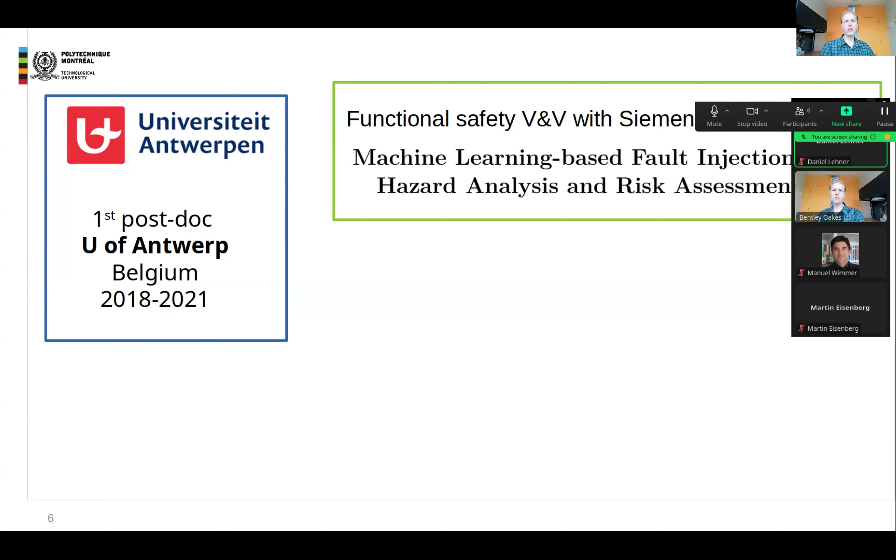I just want to do some brief slides so you know my background. I did my master's and PhD at McGill University. I did some work in video game AI for my master's, and then for my PhD, I did model transformation verification as part of a Canada-wide project. This is where I got into formal techniques, formal verification and validation. It was with IBM and GM, and I did a research stay at GM. Then I did my postdoc in Antwerp with Hans Vangheluwe, continuing this V&V line of research, doing functional safety V&V, really getting down into the co-simulation level.

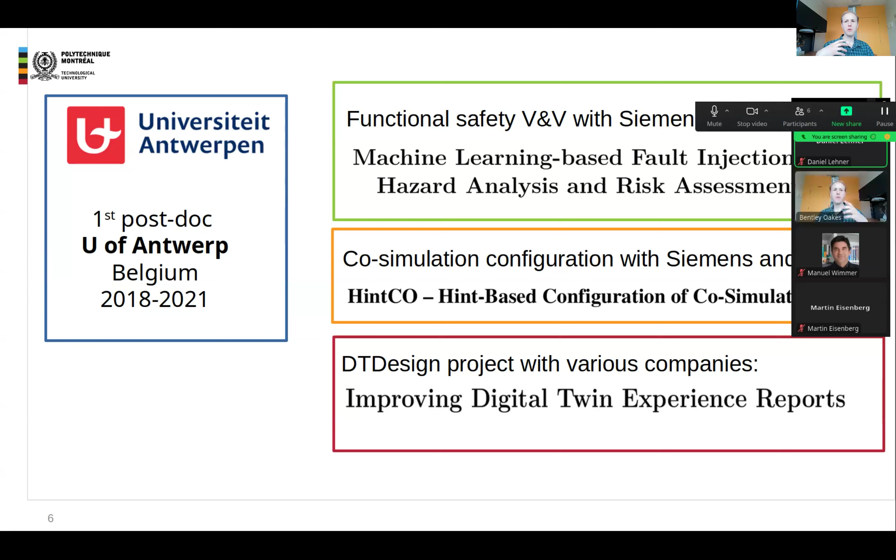And then I started getting into digital twins. One of the first things we worked on was the DT design project, which has been fairly successful with many publications. This is where it started, with experience reports and trying to improve the reporting of digital twins. Then I came back to Montreal, did my second postdoc, working on domain-specific machine learning workflows - an entirely different line of research. I started getting into ontologies, working with NASA JPL, discussing their tool OpenCaesar, which is a really great tool for creating ontologies, but I'm not going to talk about that in this presentation.

I've still been working on digital twins during this postdoc, looking at model qualities. Now at Polytechnique, I'm an assistant professor in the Oakes Lab, and really it's about accelerating knowledge engineering for complex systems. I want to take everything I know, my background, and combine it together to ask: how can we take domain knowledge and use it to create digital twins for complex systems, making them safer, better, and more efficient. So the current focus of my research right now is accelerating and systematizing digital twin engineering. I think there's still a lot we need to do.

Okay, so what is a digital twin? Don't worry, I'm not going to spend too long on this, since I assume you have the background. I always like to point to Andreas Fortman's wonderful literature survey - 112 different definitions. Just to show a few of them here, all these different definitions. When I was teaching this in class, I scared my students and said, okay, now I'm going to take the next 3 hours and read them all in a monotone voice. But I show this just to say there are all these definitions, and they don't quite represent what a digital twin is.

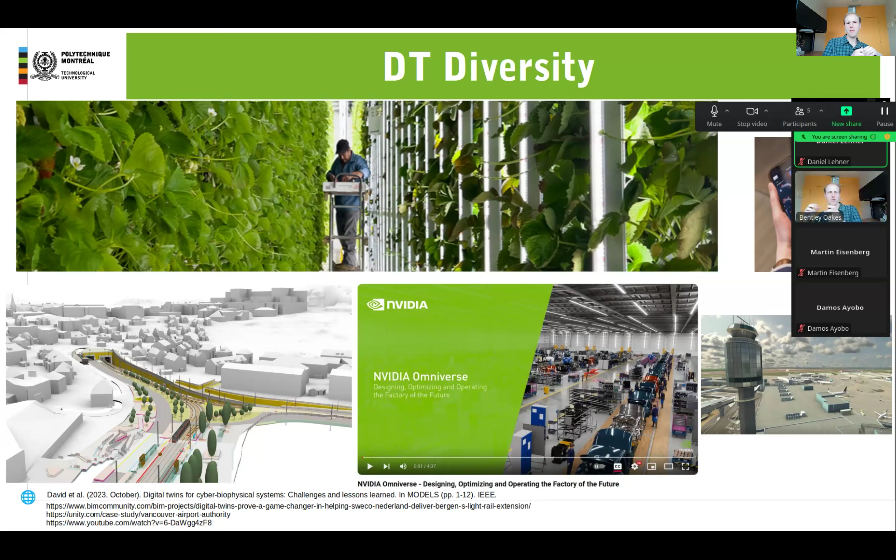So it's a fantastic example of a digital twin. There's another example, and I'll put the links down here, of the Vancouver airport built within Unity with a little app. You can see the passengers moving around and the security problems and things like that. All of these show different diversity, different loops, different temporal loops - some with nothing built yet in the real case, others with cyber biophysical systems like the strawberries, which have a different loop and you can't really control the strawberries. There's so much diversity here.

So whenever I talk to someone, whenever I talk to a researcher, I don't want to talk and argue about definitions - is it dynamic and virtual, is it a model, how do things connect. I don't want to. I would rather talk about what a digital twin is and what it does for you.

So whenever I talk to someone, my questions are: okay, you have a digital twin, what services does it provide? Is it real time? How did you engineer it, what was the process? Because I'm a researcher, and many other questions. But I like to focus on this way and say it's question based, right - it's not the definition, it's what have you built already.

Another aspect of this is just unclear info and reporting. From this first paper in 2021, I was reading these papers and I was just like, no, I'm missing essential information, I'm missing the answers to these questions that I want to know about because of the lack of standardization. As an example, I hope everyone is familiar with the definition by Kritzinger.

The difference between a digital model, a digital shadow, and a digital twin is the manual and automatic data flow. For a digital shadow, from the digital object to the physical object, things are manually done, and in a true digital twin, if you want to call it that, from the digital object to the physical object it's automatic. To put it another way, is your digital twin doing something automatically on the physical twin? If so, then it's a real digital twin by the definition of Kritzinger. We can argue about whether this definition is good, but for me it's interesting because I really care about whether it's automatic or not. If you think about the automatic collection of data, I think that's a really significant difference.

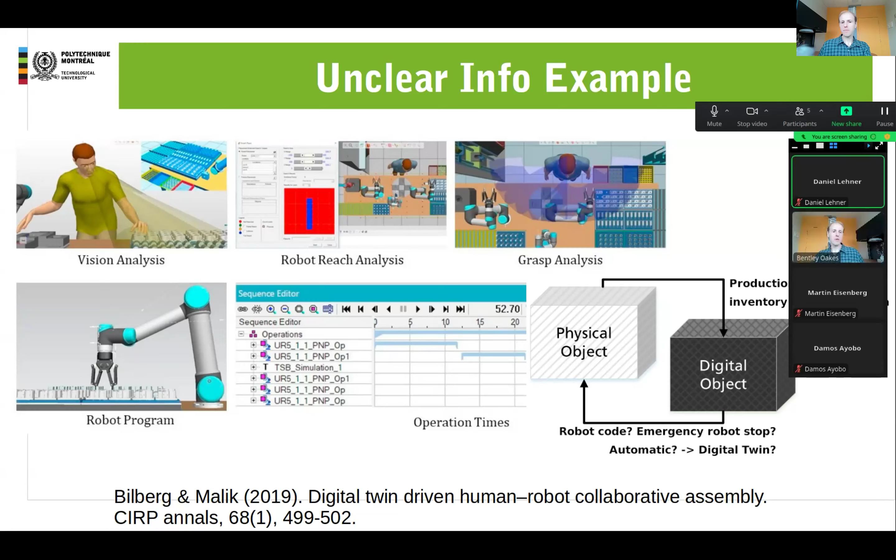So go farther into acting as a researcher - yeah, I care about the services, the technology, the models, the engineering milestones. Yeah, that's what I mean.

The community series is all about, and the wonderful EDT.Conf is about, gathering information and sharing this as researchers. So I want to know this. I want to see this in papers. I want to read, okay, what exactly was done, and not being vague.

Here I mentioned the ACM empirical standards, the case survey of reading all these papers and then taking the qualitative data and turning it into quantitative data. If we had more explicit case studies in digital twins, we could start to do these higher level surveys and systematic literature reviews and say, okay, what are people actually doing in their digital twins? And we're not there yet.

So that's what I want to do. I want to push this forward so that we can do further research. Okay, so that's the motivation. I hope everyone agrees with me that we need to make it more systematic, really.

So I'm going to move on to our proposal for the reporting framework. The goal is to come up with some characteristics, and of course there's no correct answer for this, but just to say, okay, what are the characteristics that we would like to see reported and discussed in papers? Move towards some common language, textual and graphical. For me, it would be nice if we could start to agree on some terms and some visual representations, though I know my preferences are not others' preferences.

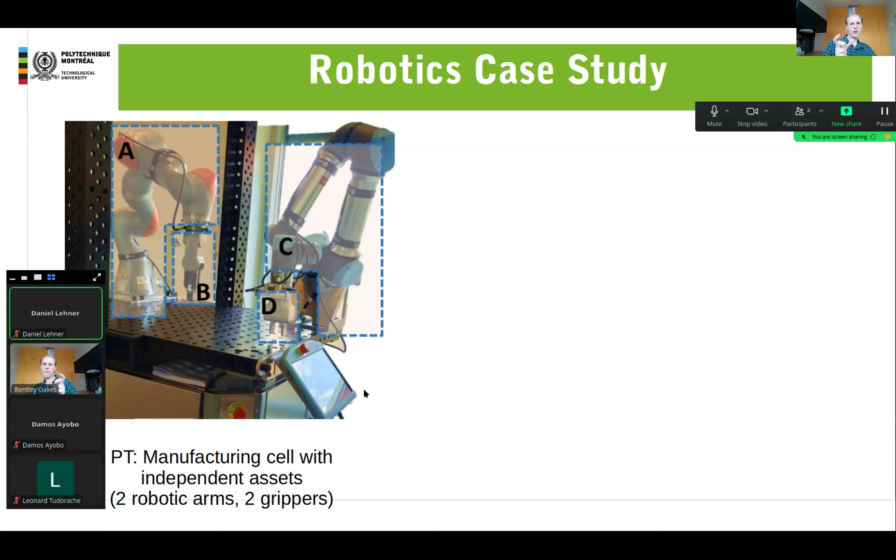And on the digital side, this is a visualization in Unity, but what I want to highlight here is the services - what can the digital twin do? It does what-if simulation, trajectory visualization, discrete working space commands, and deviation checking.

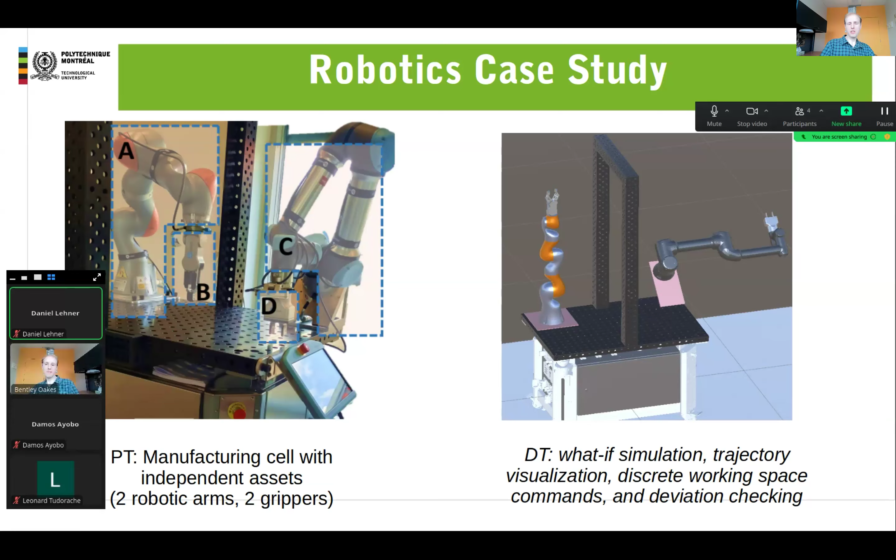But my hope is that we can start to create these figures and say, okay, this is my digital twin, this is what it's doing. For me, this isn't the complete visualization - I'm sure there will be many iterations in the future, but it's just to start and say here's the conceptual architecture, here's how the data flows through it, and here's what's being communicated with the physical twin, because sometimes that's really missing in papers.

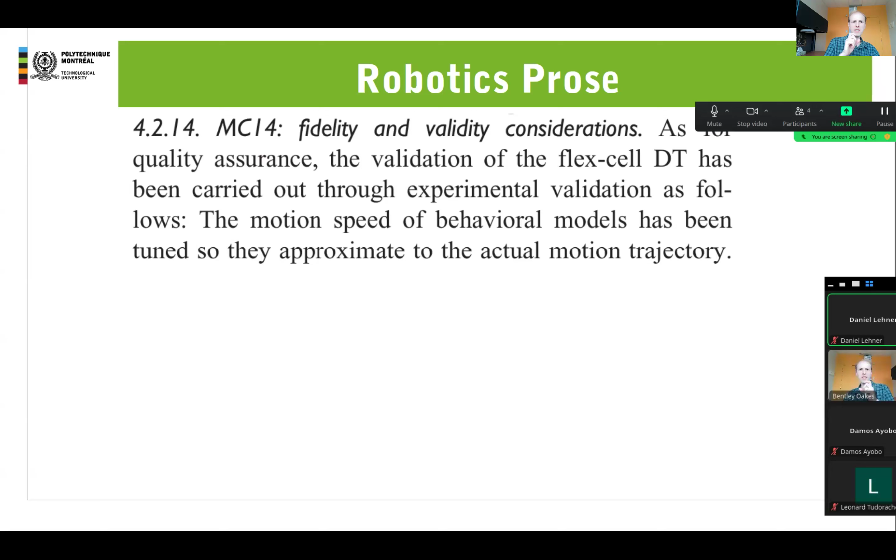We've heard about this, I've read about this a lot, but people don't explicitly talk about it. So this is just a section from the journal paper. As for quality assurance, the validation of the flex-cell DT has been carried out through experimental validation as follows: the motion speed of behavioral models has been tuned so they approximate to the actual motion trajectory. And there's more description of this characteristic.

And that's for the validity considerations. Then looking at model fidelity, which is again another thing that people say - okay, my digital twin is high fidelity, it's just okay, but what do you mean by that? I really want people to describe in their papers what they mean by that. So here, some of the limitations in terms of model fidelity are as follows.

Kinematic models do not include the kinematics of the grippers. Trajectory generation provides certain time behavior based on assumed motion speed, et cetera. This is details for the robotics case. But again, what I want to see is tell me in your papers about fidelity and validity considerations.

When I read these as a reviewer, I'm not going to reject it based on this. These are just limitations of your project. That's okay, you only have so much time and effort to spend on it. But tell me how you know it's high fidelity. Tell me how you know that your digital twin is valid. I want to know that. I think it's very, very important.

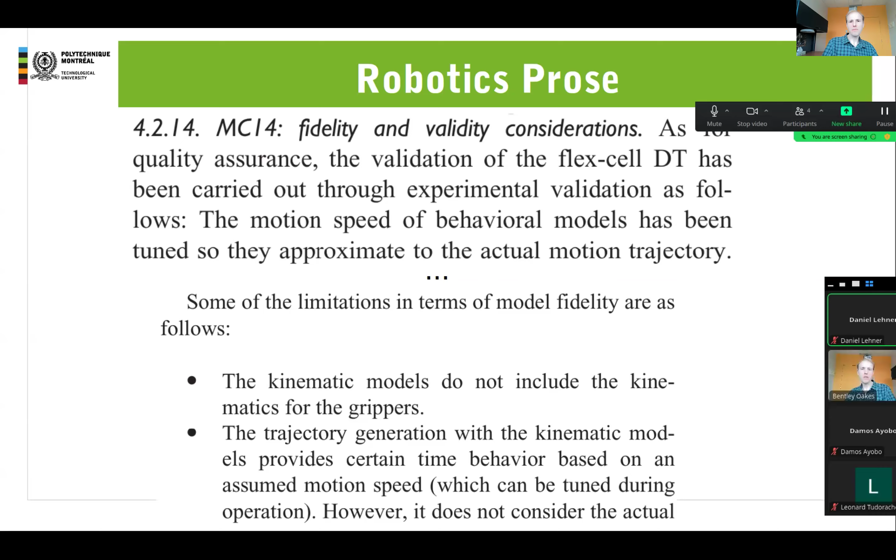Okay, so that was looking at the framework. I'm just going to briefly go through the characteristics and I'll make my slides available later. So I have 6 pages on this.

So the system under study is the physical twin of interest and the environment and everything around it. The physical acting components is, okay, how does the DT act on the PT? Physical sensing is, okay, how can the PT give information to the DT? And then talk about the physical to virtual interaction - tell me what's going on there.

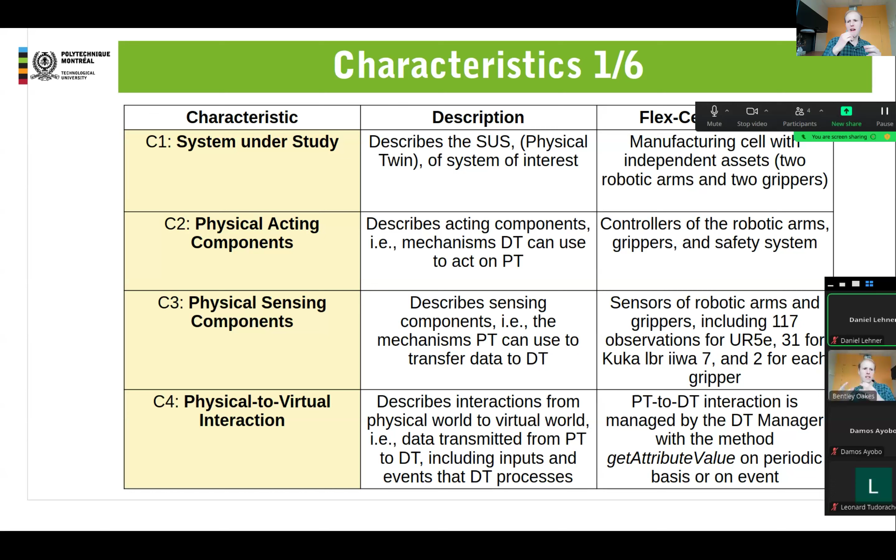What's the data, any input events, what's happening there? Virtual to physical - tell me about the other side. What's happening from the DT to the PT? The data, the insights, the actions - tell me about that.

The digital twin services - I want authors to be very explicit about what the digital twin is doing for the PT in terms of these higher level services. I should clarify this is not like the microservices thing - this is closer to something like a business goal, like optimization, task planning, and visualization. I think those are nice concrete services that the DT provides at the right level of abstraction.

The twinning timescale - I think this is important. What's the timescale? Because if you're talking about optimization, you could say, okay, my optimization happens in real time, right? But if you're doing predictive maintenance, you could say, well, I'm scheduling something for next month. To me, that's a very different time scale. Even for real time, are you worried about the nanoseconds, the milliseconds, or is it like, well, something will happen within the hour?

These are different: slower than real time, and faster than real time. If you're doing what-if simulations, then you have to be faster than real time, right? And then you might say, well, we're predicting something in a month or 2 months from now. That's very valuable information.

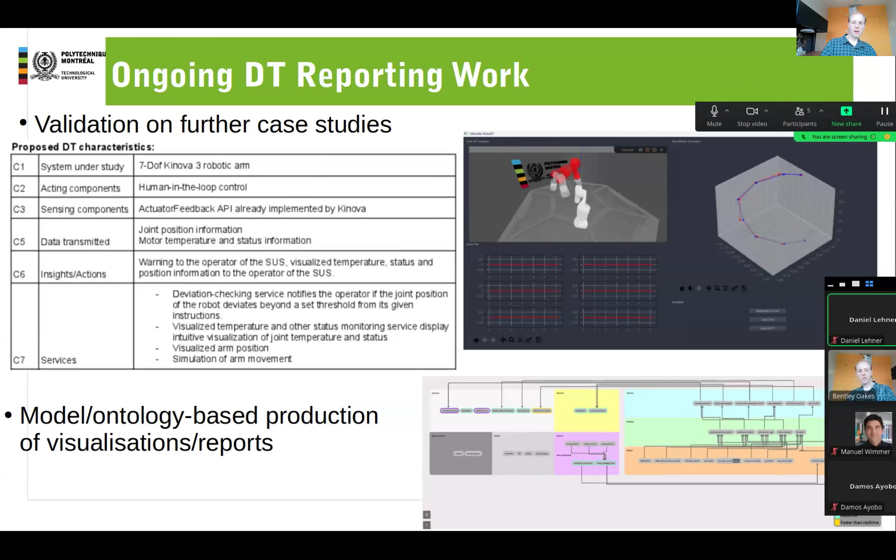I also have a master's project working on, what if we don't just have this as a descriptive framework, but start to make it prescriptive? I just want to give a glimpse of future work because we're working on it right now, looking at can we start to generate visualizations or reports based on this framework. So stay tuned for news about that later this year.